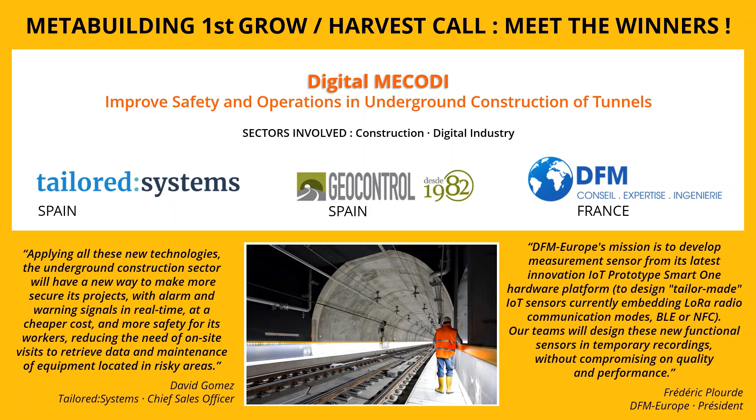Tunnel design and construction is full of challenges that requires experienced professionals and engineers. During the last 50 years, geotechnical engineering has been incredibly developed, but still there is room for improvement and automation. For example, convergence measurements during tunnel construction is still quite labor-intensive.

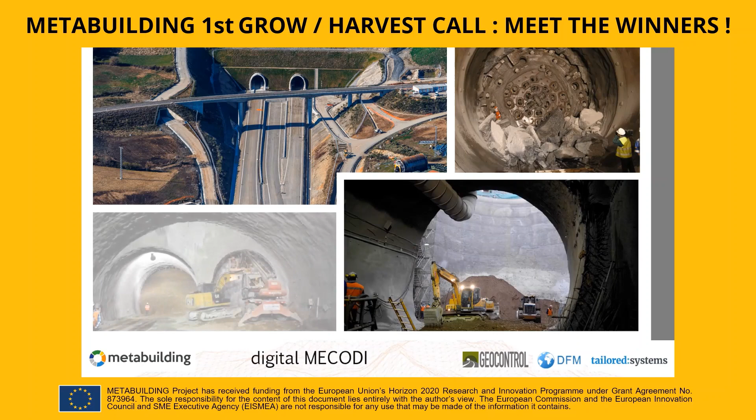The digitalization and automation of this task is one of the objectives of the new digital MECODI system, developed by a partnership of 3 companies: Geocontrol, Tailored Systems, and DFM Europe. Each one provides a specific added value to this project.

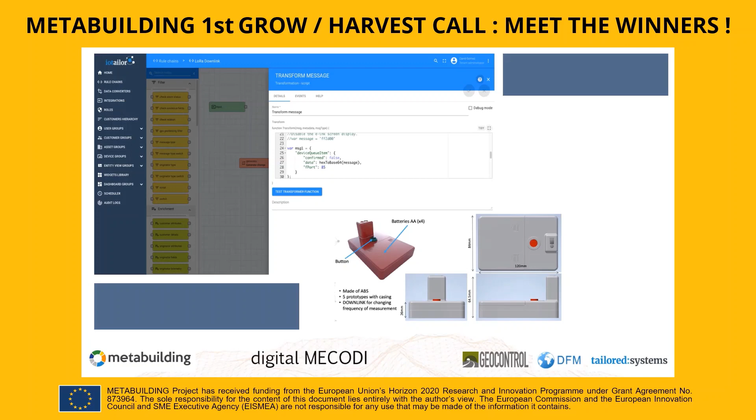The digital MECODI platform aims to provide a cost-efficient solution for measuring convergences inside of a tunnel, with easy installation and low maintenance needs. It ensures the continuous and automated monitoring of the tunnel, wirelessly transmitting data in an autonomous mode. To better understand it, let's first explain how tunnel excavation is normally monitored.

During the excavation of any underground structure, the stress balance in the ground is modified. This reorganization of forces around the excavation induces a certain degree of deformation at the perimeter of the excavation, which depends on the geomechanical parameters of the ground.

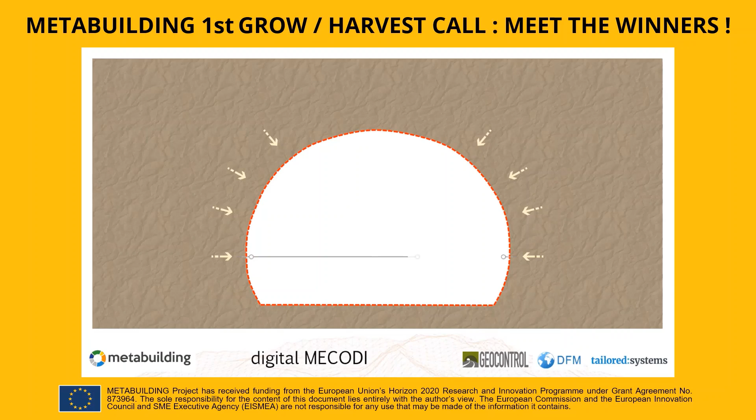Traditionally, this deformation, called convergence, is measured in situ by measuring the relative distance between 2 reference points on the perimeter of an excavation. This is the most effective method for monitoring the stability of the tunnel and is very important for characterizing and predicting the behavior of the excavation, as well as for evaluating the adequacy of the parameters used in the design calculations.

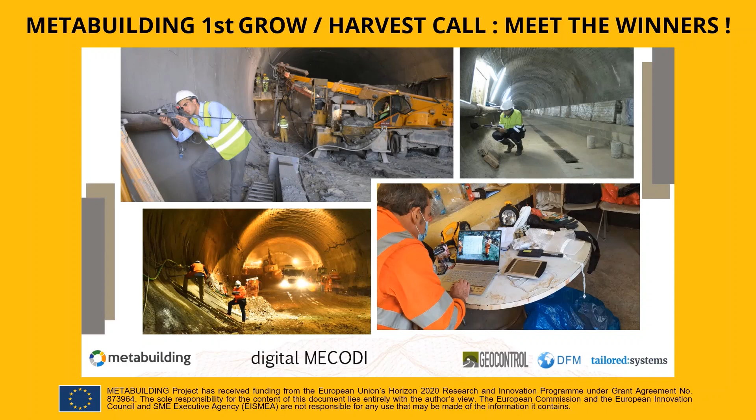In the traditional method of convergence measurement, the person taking the measurements uses an extensometer, takes the data on a paper template, and then types the measurements into a spreadsheet, containing 1 sheet per convergence station. However, this manual methodology is subject to human error and is time-consuming.

In addition, this measurement system interferes with tunnel excavation activities, and when tunnels are in service, the measurements cause service interruptions and have to be carried out at very specific times, usually at night, and under the strict supervision of the owner.

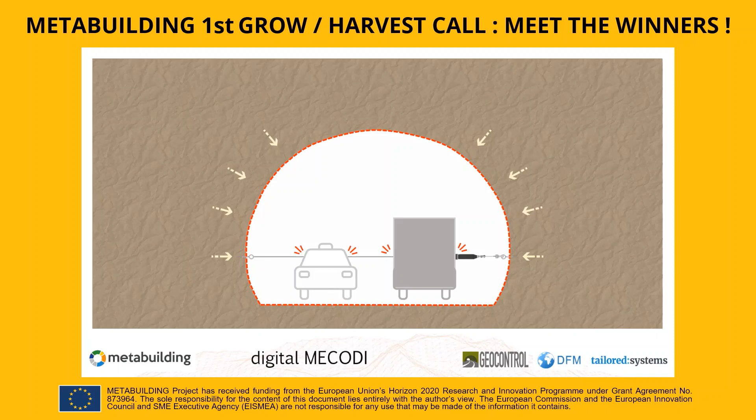To avoid these inconveniences and ensure fast and efficient management of convergence measurements, the new MECODI system is a tool designed to measure, store, and manage convergence measurements in real time, thus enabling the technical team to anticipate tunnel construction problems.

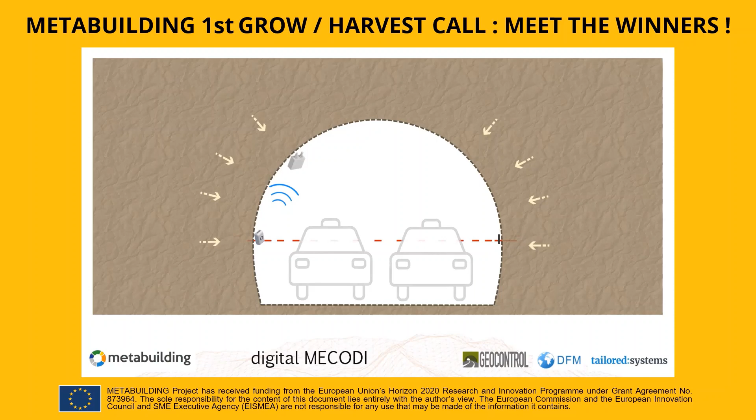The MECODI system, taking advantage of the latest technologies, performs convergence measurements using precise laser distance meters, allowing several measurements to be taken per day without affecting tunnel activities. This is particularly important when it comes to measuring convergences inside of underground structures in service, with road or rail traffic.

MECODI also applies new Internet of Things technologies and state-of-the-art software development. The measurements recorded by the laser distance meters are sent to a LoRaWAN gateway, a physical device that hosts both the hardware and the firmware used to connect the laser devices to a web server in the cloud.

LoRaWAN is a connectivity protocol known for its low power consumption and long transmission range. It is also highly resistant to interference, as it is based on military and space technology.

The gateway then converts the readings into a signal compatible with the web server. From there, the MECODI system stores all readings and manages them in real time. The end user can then obtain all this information and process it to understand what is happening in the tunnel.

During the design development phase, the team identified the specifications of the devices to be procured. Once obtained, they were tested and calibrated in the laboratory.

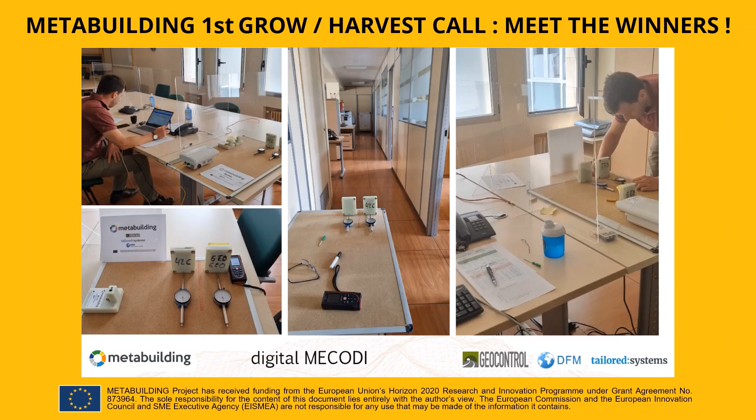Once the lab testing was completed, the team was able to run the system on a real project, as Geocontrol participates in the construction supervision of some of the longest high-speed railway tunnels being currently built in Spain, in Pajares, Asturias. 4 laser meters were installed in the Pontones tunnel as well as a LoRaWAN gateway.

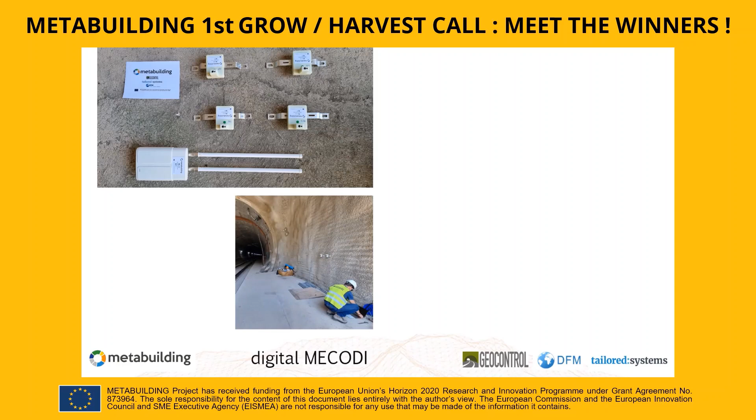2 of these laser devices had a 1 mm accuracy and the other 2 0.1 mm accuracy. Once the installation was completed, the entire system was checked to ensure that it worked by means of a platform that verifies the system status.

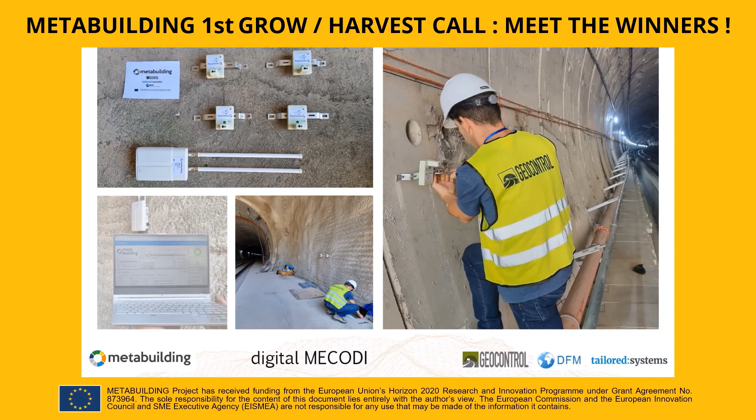After completing all the development phases of the product, the MECODI system is now working properly, although there are still some issues to be solved. It has been found to be sensitive to network coverage, so there are periods when there are no records. Further research is needed to confirm that the reading interruptions were due to the lack of internet coverage. Also, the weatherproofing and finishings of the laser devices need to be improved.

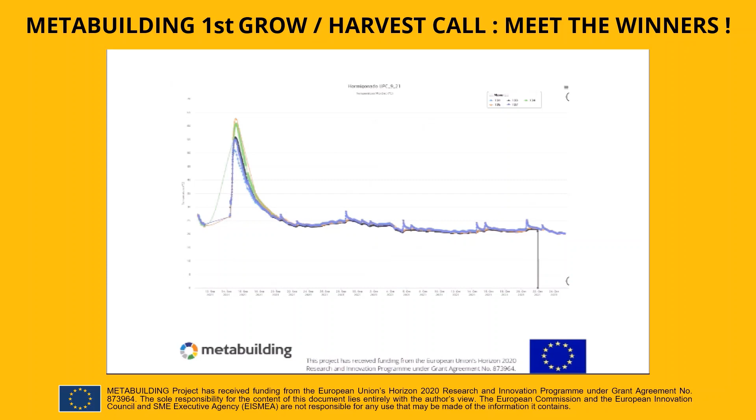CEO of Metrica 6, and we are the leaders in the consortium for the metabuilding project called Natural DigiBuilding. What we did during this project is that we created several devices and a platform to control these devices and check how they perform.

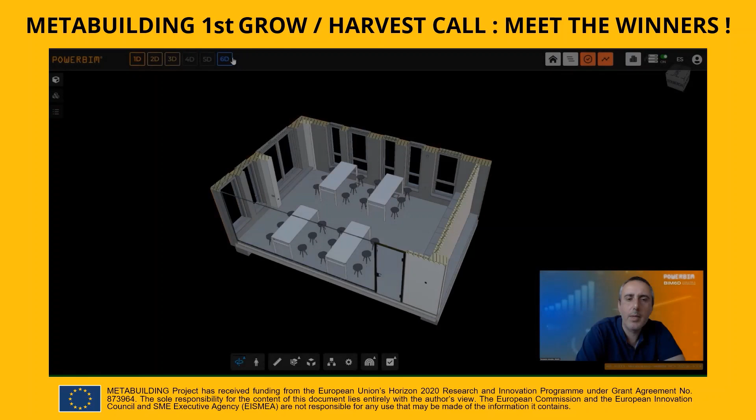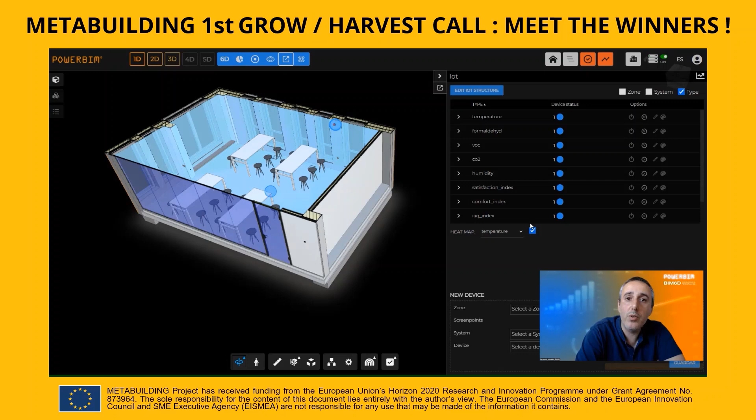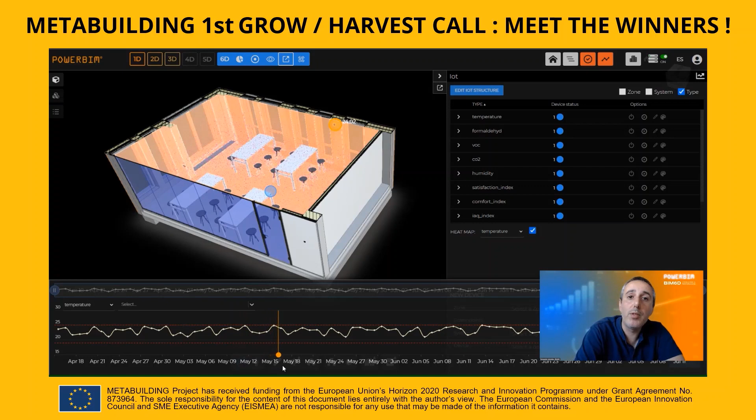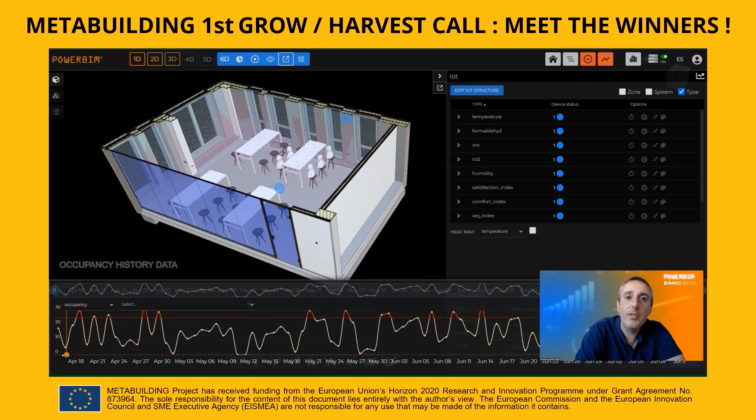The main goal of Wellbeing is to demonstrate the use of digital twins to improve the comfort and indoor air quality of buildings, bringing valuable information to users. The project consists of obtaining measurements of CO2 and other pollutants in the air and ambient data such as temperature and humidity, as well as automatic detection of people in the room, crossing the data with the BIM model as a reference in order to analyze all the information in real time, and being notified if the values are in warning, meaning we need to open windows to improve the indoor air quality index.

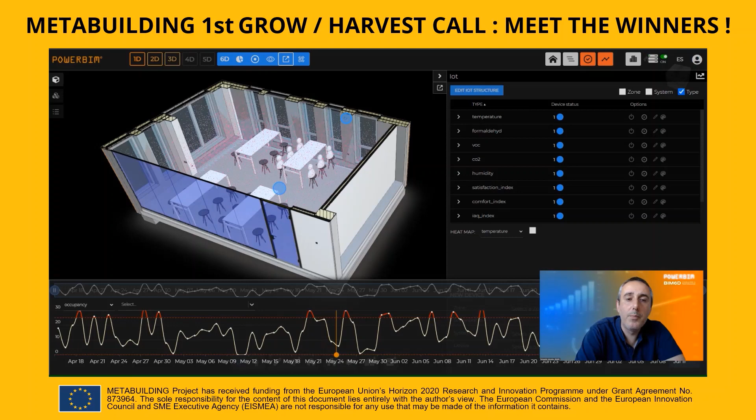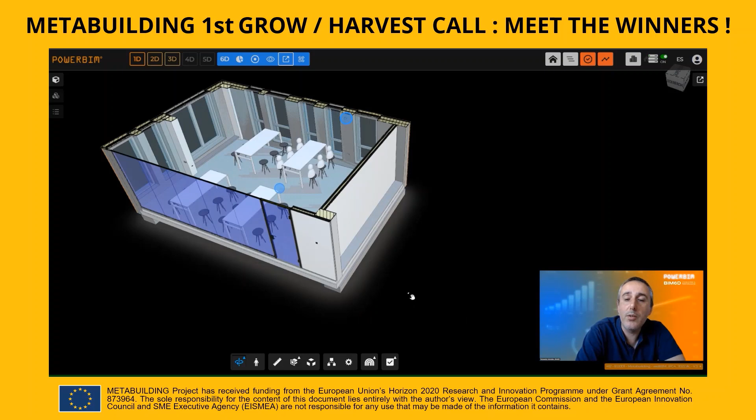Our PowerBIM digital twin platform integrated with IoT technology is the key factor in the Wellbeing project. These technologies are the ones we propose to improve interior conditions in the spaces we live and work in, for the 90% of time people spend living in cities.